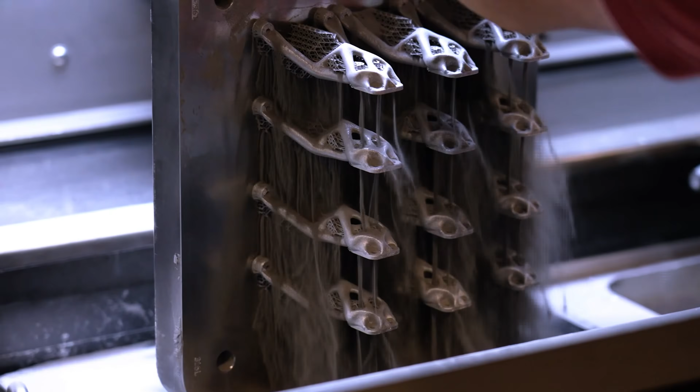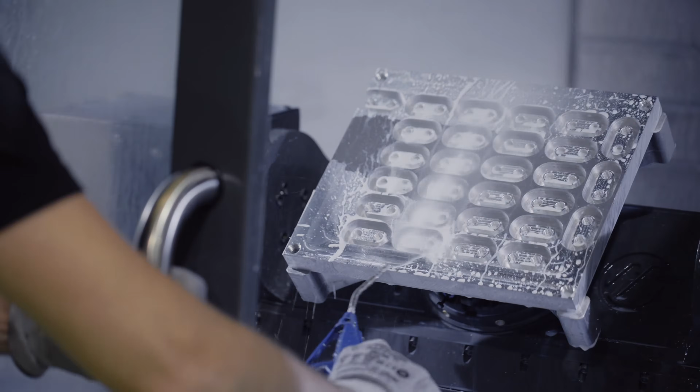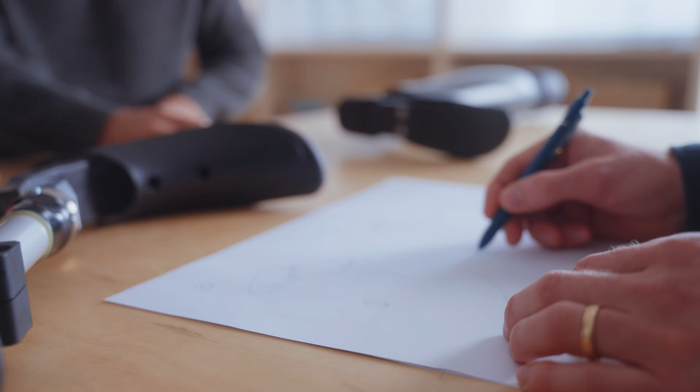Let's begin with a quick definition of prototyping versus production. In engineering, prototyping is the creation of preliminary versions of a product to test its design and functionality before final production. The purpose is to identify issues, gather feedback, and improve the final product so that it is ready for production. Production refers to the process of manufacturing parts on a large scale, and the purpose of production is to efficiently and consistently produce high-quality end products or parts that meet customer requirements and specifications.

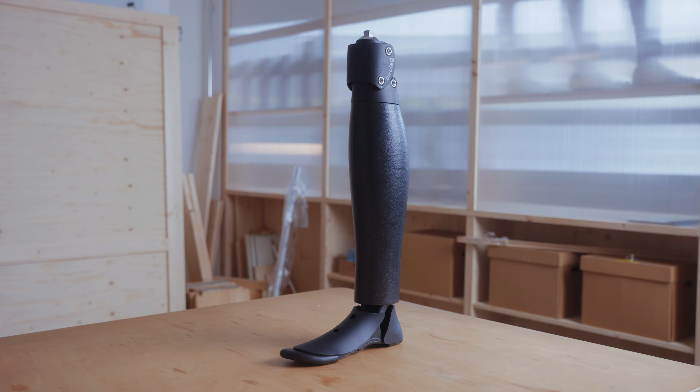Now let's dive deeper into differences between prototyping and production runs. Prototyping allows you to really put the design through its paces and identify any potential problems or areas for improvement. That way, once you shift into production mode, you've got a finely tuned design that's optimized for efficient, cost-effective production runs. The more you can streamline and perfect the design up front during prototyping, the smoother the transition will be. A little extra effort early on can pay huge dividends by avoiding costly mistakes and delays later.

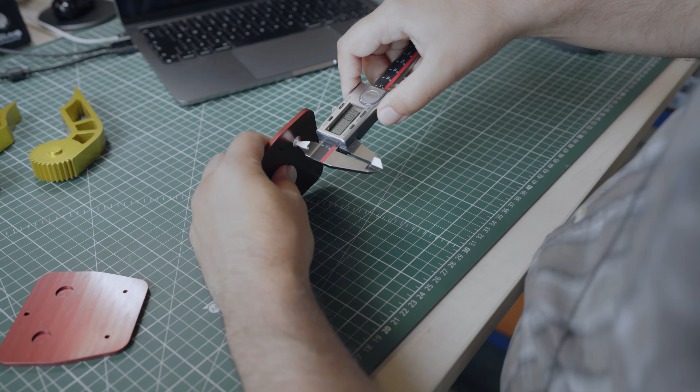When you're prototyping, you can use inexpensive and easy to find materials. It doesn't have to be perfect quality at this stage, but for the actual production, you need to work with the good stuff. We're talking about high quality materials and manufacturing processes. Quality control is super important here to make sure every single product meets the standard the customers expect.

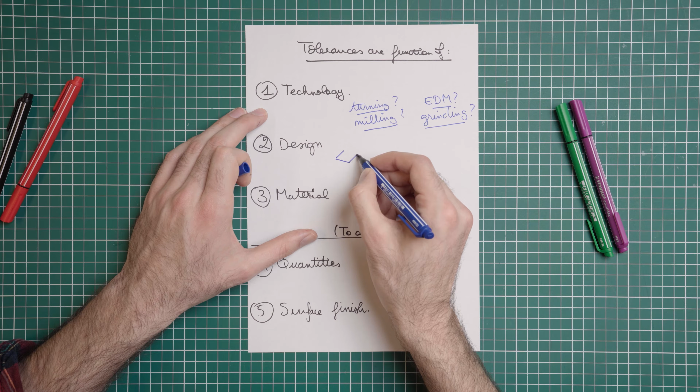During the prototyping phase, you get to play around and try out all kinds of ideas for design, features, you name it. If something doesn't quite work, no worries. Just tweak it or ditch it entirely without any major headaches. The beauty is the flexibility to chop and change things easily. But once in production, with manufacturing lines and processes locked in, making changes isn't so simple anymore. Every little tweak needs careful thought since it could block the whole operation. And we're talking real costs in time and money too.

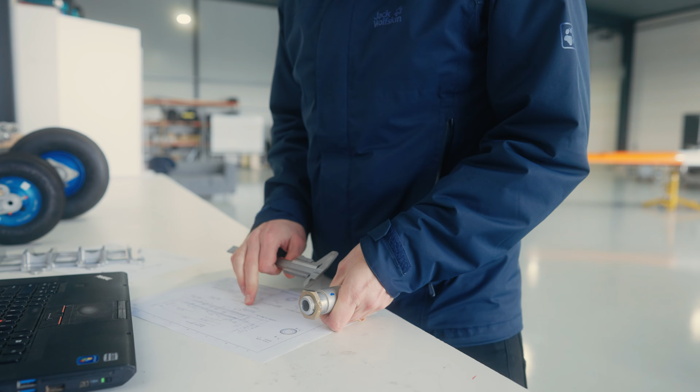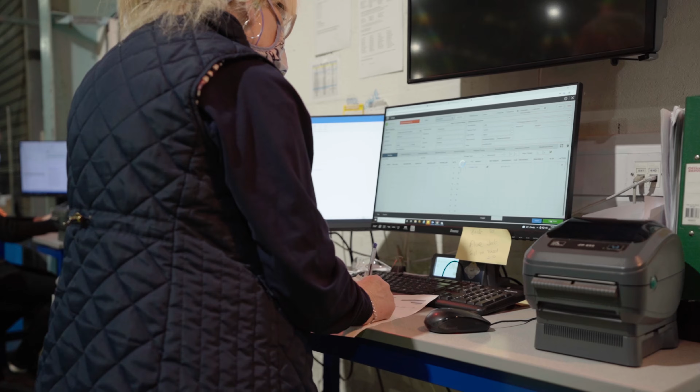While documentation during the prototyping stage might be less comprehensive and formal, it is during the production stage that detailed documentation becomes crucial. This includes processes, specifications, quality standards, and regulatory compliance, all necessary to ensure consistency and reproducibility across all units produced.

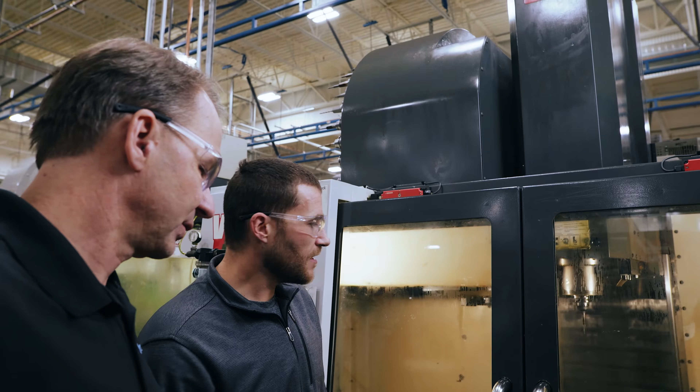Prototyping is all about good communication with the manufacturer to nail down your optimal design. But when you shift to production runs, the priorities change. Now it's critical to coordinate with suppliers, stay on top of lead times, and ensure every component meets the quality standards. You need a rock-solid supply chain and manufacturing partners you can really trust.

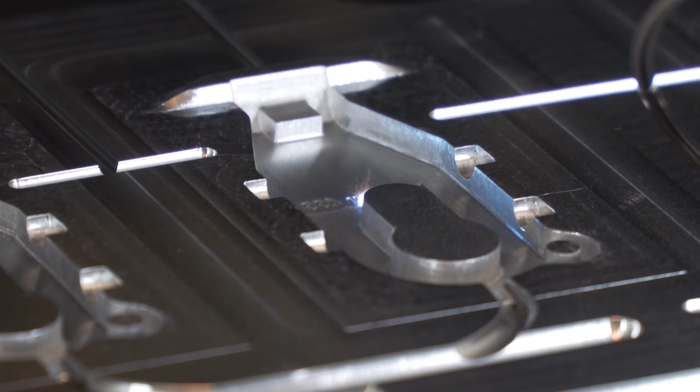And at Protolabs, we get it. Finding the right manufacturing partner is crucial, especially when it's time for production runs. That's why we take the time to really understand your product inside and out. Whether we handle it in-house or tap into our global network, we'll match you with a manufacturer that's the perfect fit.